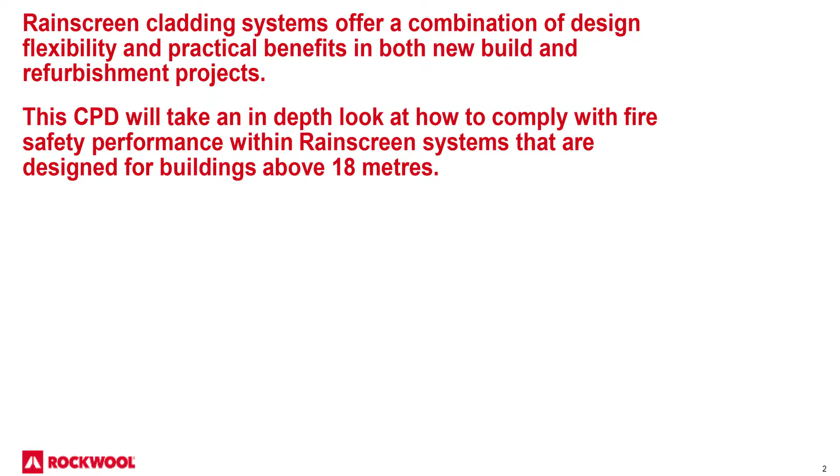This CPD looks at rain screen cladding systems, a combination of the various designs and products out there on the marketplace. We'll also look at how you can not compromise on the design, in particular for buildings above 18 metres. What I'm seeing, certainly since Grenfell, is an interest in using non-combustible insulation for cladding systems below 18 metres as well, a belt and braces approach, but we'll touch on that shortly.

So the contents: we'll have a look at ROCKWOOL. I'm sure a majority have heard of ROCKWOOL before, celebrating 80 years this year. We'll look at the background as well, BR135, which is the driver in respect of external insulants, and also the testing, BS8414, full-scale fire testing, both parts 1 and 2.

Then we'll take a brief look at all the stakeholders - Aviva, Zurich, Allianz - who are getting pretty vocal, as you could probably imagine. They're looking at mitigating a lot of their loss, which currently stands at just over £9 million a day as of 2015. And then compliance without compromise.

We'll look at the insulants that are out there on the market, everything from your foams, glass and stone wool.

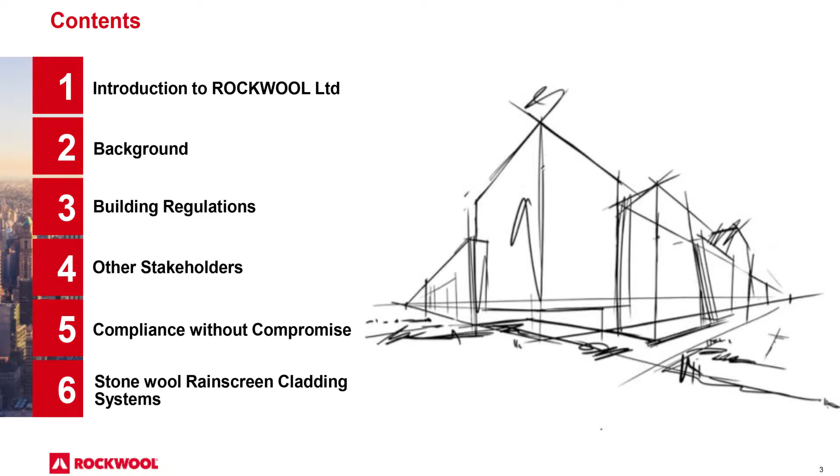So the ROCKWOOL Group, as I said, we're celebrating 80 years, still family owned to this day, owned by the Kähler family. Headquarters is over in Denmark. Operational in 37 countries worldwide, and you can probably see from the chart, majority of it is Western Europe, 49%, and Eastern Europe. We're commissioning another plant over in North America.

We've got sister companies - Rockpanel and Rockfon. Rockfon manufactures ceilings, Rockpanel external cladding. We'll talk about Rockpanel shortly when Jenny takes the stage.

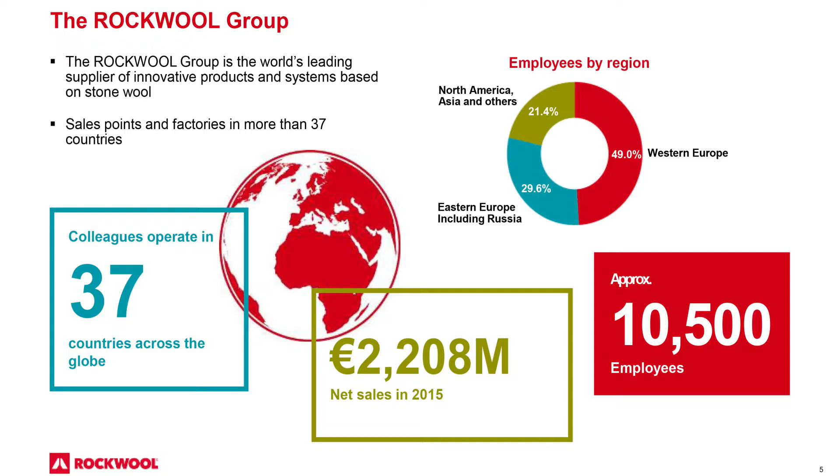Net sales in 2015 were 2.2 billion euros, and we've got approximately 10,500 employees worldwide.

Here in the UK, we produce out of Pencoed in Bridgend, South Wales, and I've got a sample here. It's basaltic rock. We actually bring that in from just outside the Giant's Causeway. You'll be surprised how many specifiers and architects out there still think we're made out of Newcastle Brown Ale bottles. No, that's glass insulation - this is ROCKWOOL.

So we bring it in from just outside the Giant's Causeway, put it on a boat in Belfast, ship it down to Cardiff, then from Cardiff up the M4 to Pencoed in Bridgend. We've been operational there since 1979, with just over 450 employees here in the UK.

We've also got a marketing and sales function operating out of Chiswick in central London, and the plant was expanded in 2009. We've probably got what could be classed as the most up-to-date production line within the ROCKWOOL Group.

We have the patent in respect of dual density technology, and what I mean by that is on the interface of the rain screen duo in particular, which you'll find in external facades, it's less dense than the actual main core body of the insulation. The benefit is it allows accommodation of any undulation, in particular on masonry substrate, so you're reducing that cold bridge effect.

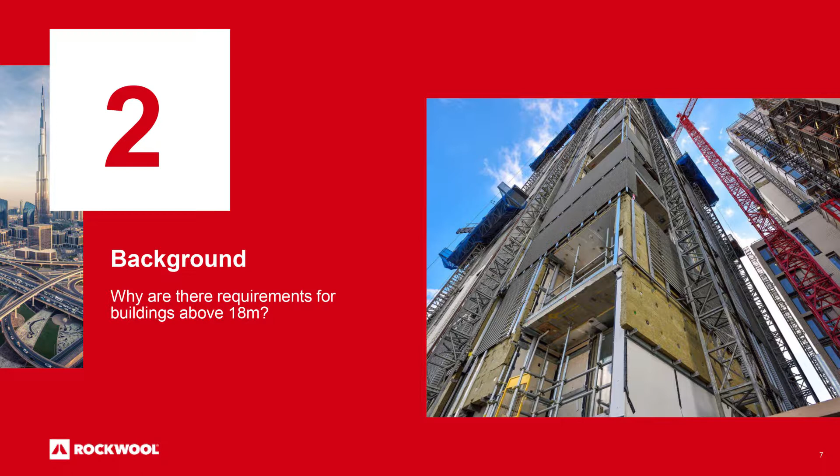So background - anyone like to tell me why 18 metres? Why not 12? Why not 13 metres? Come on, looking for a bit of participation now. Anybody? It's tied up with the old building regs, 50 feet, 60 feet. Yeah, you're right. It's also deemed the safest height to tackle a fire from street level to parapet.

But I'll give you a fact: the first responders to Grenfell on the 14th of June this year, the tallest ladder they had on the appliance, the first appliance to reach the scene, had a reach of 13.6 metres. Yes, 13.6 metres. What they typically tend to do, though, is stack the ladder on top of the appliance. Unfortunately, they couldn't do that at Grenfell.

The reason for that is because all that aluminium, all that insulation, was melting and dropping down. There was no safe way of actually getting under the underside of Grenfell and tackling that fire. Even so, the fire spread was so rapid it would have been fruitless.

So as you can imagine, there's some special requirements in respect to buildings 18 metres or above.

You can see here on this picture, that's the Kingdom Tower, Jeddah, Saudi Arabia. That's going to be coming online in 2019. It's 1,000 metres tall, or 167 stories. Just to put it into context, the tallest building in Manchester is going to be Owen Street, 67 stories tall. It's going to tower, pardon the pun, above Beetham Tower, the Hilton Hotel. So 67 stories will be the tallest tower in Manchester. Renaker Build are the main contractor of that project. But that pales into significance against 167 stories.

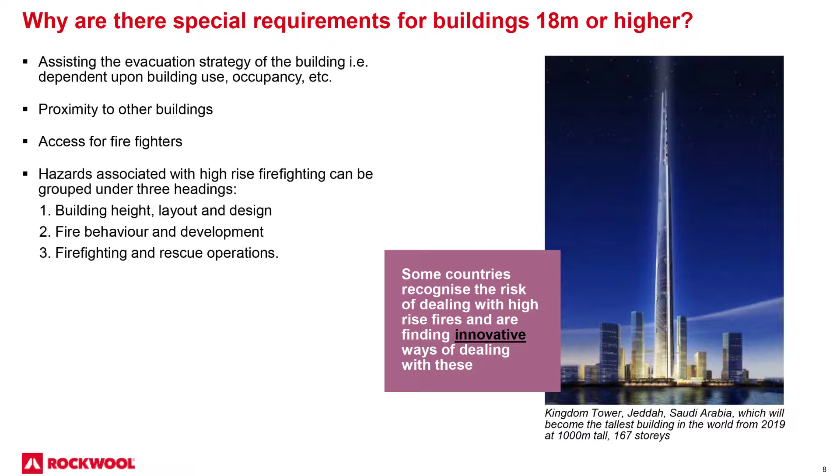Access for firefighters is another issue. Also, one of the other things we find difficult when drawing up engineering judgments is open plan offices. I know there's a couple of people here who've worked on St. Peter's Square, open plan, very difficult. You've got a lot of products in modern day offices which are flammable, combustible, and will contribute to that fire load. So it's very difficult trying to contain a fire when it's open plan in that nature.

I'm going to click on this link, hopefully it'll work. It'll give you an insight into some of the innovative ideas, in particular this one in Dubai.

So you can see from that, they have actually ordered 20 jetpacks for firefighters and first responders. That's not so the firefighter straps himself into this machine and tackles the fire, it's so they can go up with a camera and identify the heat signatures within the building, then direct the first responders on the ground to where those heat signatures are. It has a safe flying height of 3,000 metres, and I kid you not, I had to read it twice, but this thing is actually powered by kerosene, the same fuel that drives your aircraft. So you get close to the fire, and I'm sure you'll get involved with it somehow.

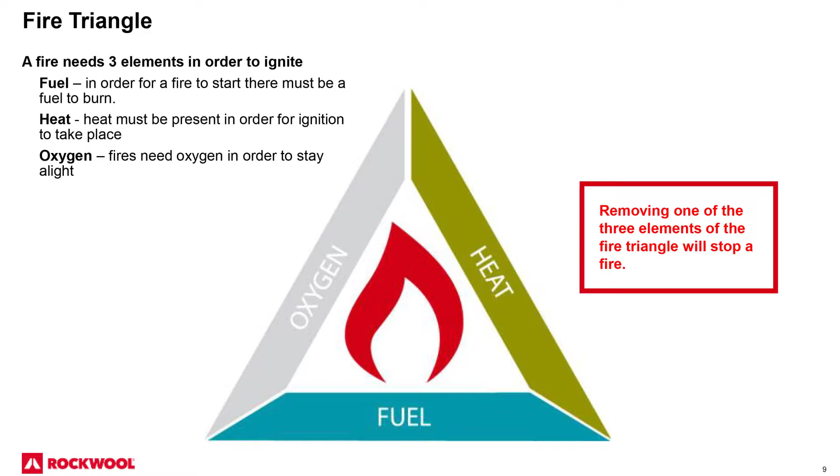I'm going to show you a short video in respect to the candle test, filmed over in Sweden. It gives you a bit of an insight as to how quickly a fire takes hold. You can see from this slide, from ignition point, start of fire and flame spread, it's usually pretty rapid. We then get to the point known as flashover, going from, as you see from the video, 200 Celsius to 800 Celsius. Anything above 600 is classed as flashover, so everything within the room is then literally consumed by the fire. So I'm going to click on this video link and hopefully it will work.

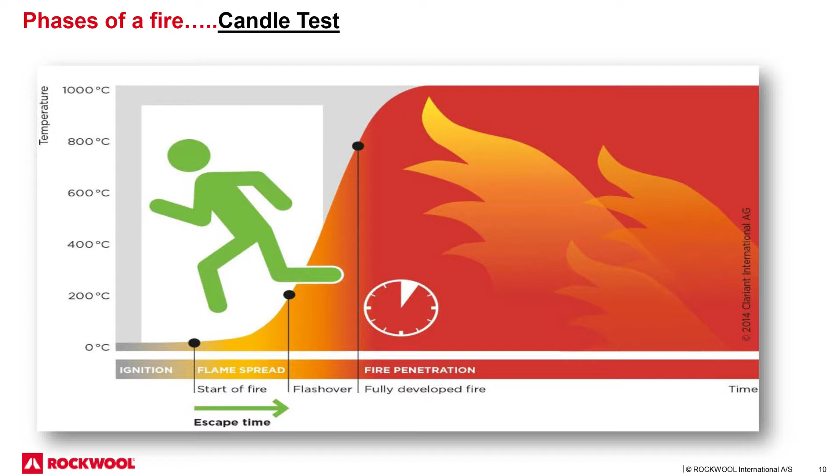So what we're looking at here is the timer and the temperature. As you'd expect, you can see various products in this video which you would find in any modern day office. You can gradually see the temperature rising here, just keep an eye on that.

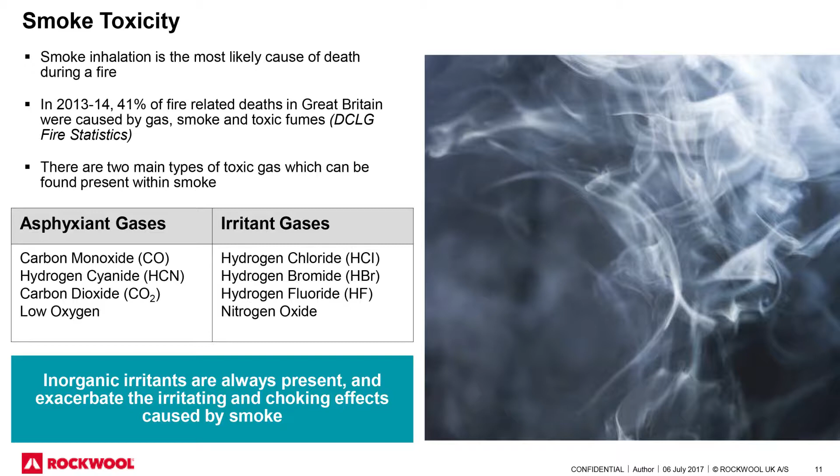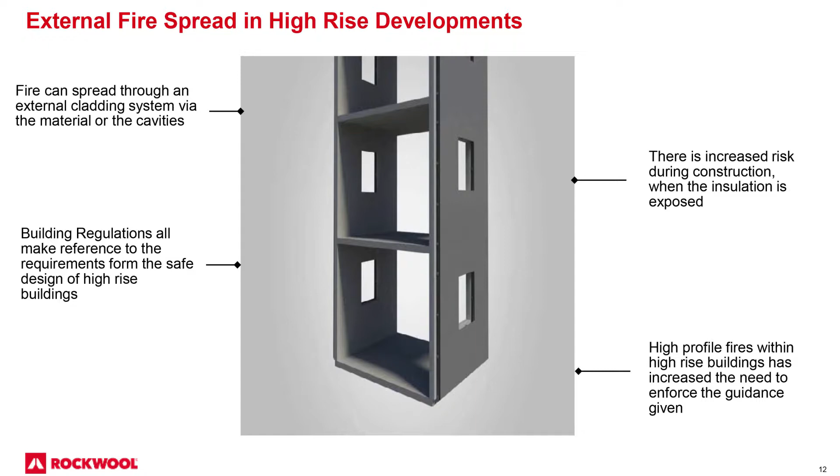So if you have a look at the external fire spread in high-rise developments, there have been a number of tests undertaken, and one of them obviously post-Grenfell. One test in particular has demonstrated that you only need a residual cavity of 25 millimetres to create that chimney effect, that spread of fire within the residual cavity. So as you can imagine, there's an increased risk of fires during the construction period. In particular, timber frame. We've seen a number of high-profile timber frame fires in and around the northwest over the years during the construction phase.

But high-profile fires within high-rise buildings are obviously increasing the need to enforce good workmanship and ensure that guidance is followed. Now, building regulations all make reference to the safe design of high-rise buildings. As you think back onto June the 14th, it was a very warm evening, so the windows are open, curtains are flapping. Obviously they're going to contribute to the spread of fire to the external surface that we saw within Grenfell.

So BR135, first edition came about in 1988. It's actually just 6 months after BS476 Part 7, which is Class O. We call it Class O, it's actually Class 0, but we'll keep referring to it as Class O, as the majority of people know it. So at this time, there was no full-scale fire testing. Basically you turned up to a lab with your sample, tested it, and that was it, off you went. They'll tell you how quick it burnt. They'll give you an idea on some of the droplets coming off. They never measured the amount of smoke, didn't even look at whether the smoke coming off that product was toxic. But nonetheless, that's all we had back then.

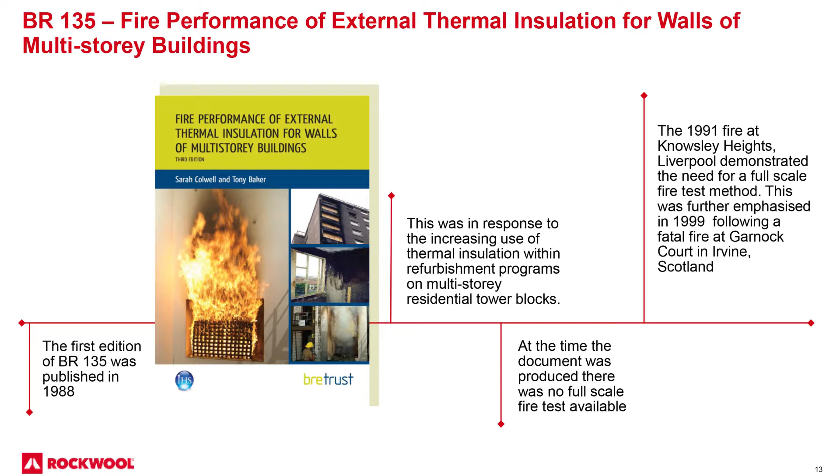But nonetheless, full-scale fire testing was to come along, and that was really in response to some of the high-rise fires that we saw. One in 1991, Knowsley Heights in Liverpool. Then the other one, which was fatal, Garnock Court, Irvine in Scotland in 1999. So in 2003, we saw the second edition of BR 135, and this was accompanied by full-scale fire testing, BS 8414 Part 1. Now, Part 1 relates to masonry substrate. Part 2 is SFS, steel frame.

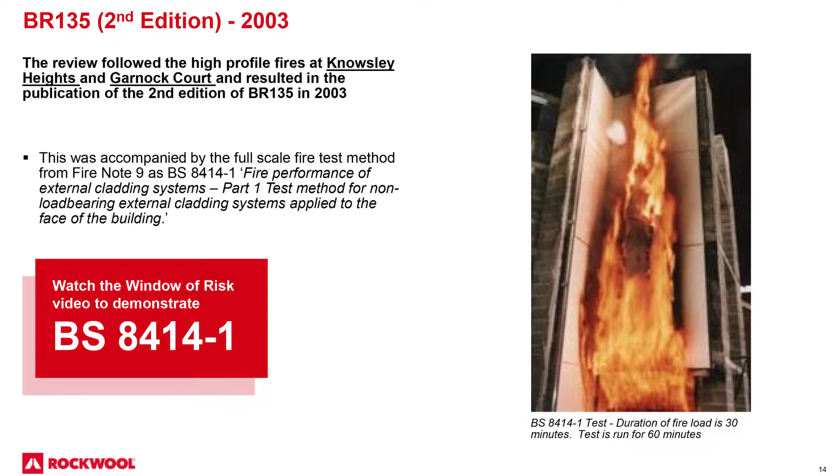I'm going to show you a short video in the next slide, and it just demonstrates the BS 8414 test. Basically, it's a 30-minute fire load. You've got the timber crib, which is ignited. That's left to burn. So what we're trying to do is emulate a real-life situation where the timber crib is ignited and left to burn for an extra 30 minutes. What we're looking at is how quick the fire spreads up the surface of that insulant, the amount of smoke given off, the amount of droplets given off, and of course the amount of heat that's going to be generated from this full-scale fire test.

I'll just click on a couple of these links. Knowsley Heights.

So Knowsley Heights was a deliberate fire over in Liverpool. That was in 1991. You had a waste bin pushed on the underside of the building, and you can see the outcome there. Now, just to think back then, we actually used to clad a lot of buildings in extruded polystyrene. Don't think there's anyone sat in this room who would ever consider that today, but nonetheless, that's the insulant that was used in many respects.

And it was this insulant that was the main cause of the fire spread and the damage you see. As I said, nobody lost a life in that particular fire, but the rapid fire spread was enormous. And as I said, it was really down to the lack of fire barriers back then, as you can imagine, in 1991, and also the combustible gases given off within the facade from the insulant.

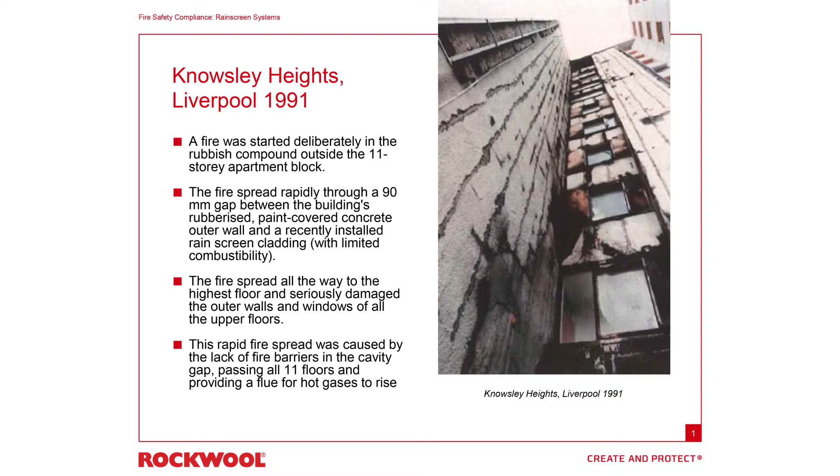We then had Garnock Court. Now, Garnock Court, sadly, there was a fatality. An old age pensioner lost their life. That happened just after midday on the 11th of June 1999. And again, the contributing factor to the severity of the fire spread was down to the recent refurbishment of this block. This was an accident. This wasn't an act of arson. But nonetheless, it was a driver in respect of moving forward to full-scale fire testing.

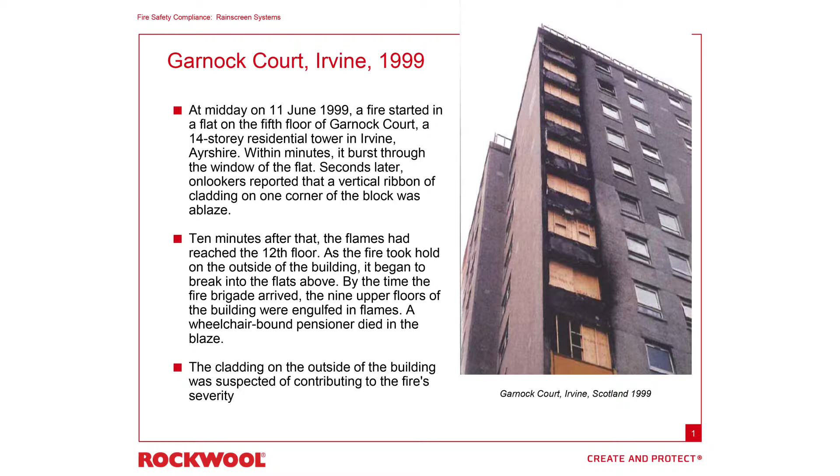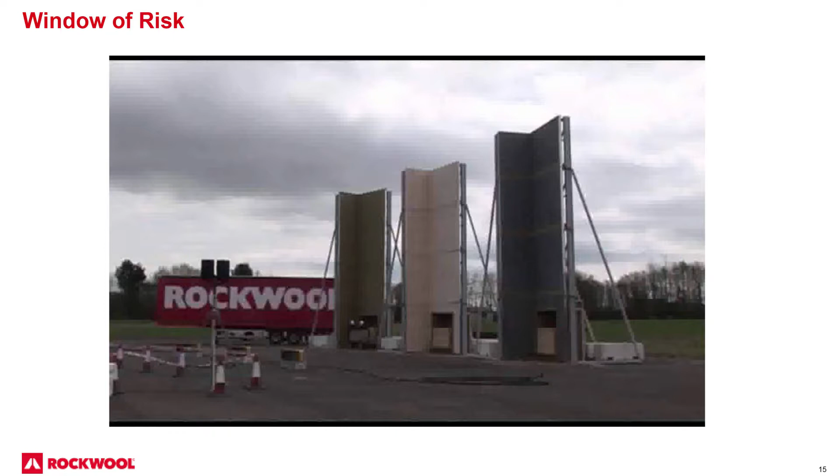So I'm going to show you this window of risk. Many of you will probably have seen after Grenfell, the BBC managed to get their hands on this video, just to demonstrate what an 8414 test is all about. What you see there to the far left, that's stone wool. We've then got foam, and we've then got polystyrene, including fire breaks. There's no clock on here. I'd be interested to see how quick you think it takes to reach the end result. So I'll just click on this. Just have a look at this.

So as I said, the polystyrene there does include fire breaks in this BS 8414 test. So what you can just see here is the thermocouples measuring the heat given off from these 10-metre rigs. Also note the smoke as well coming off the polystyrene in particular.

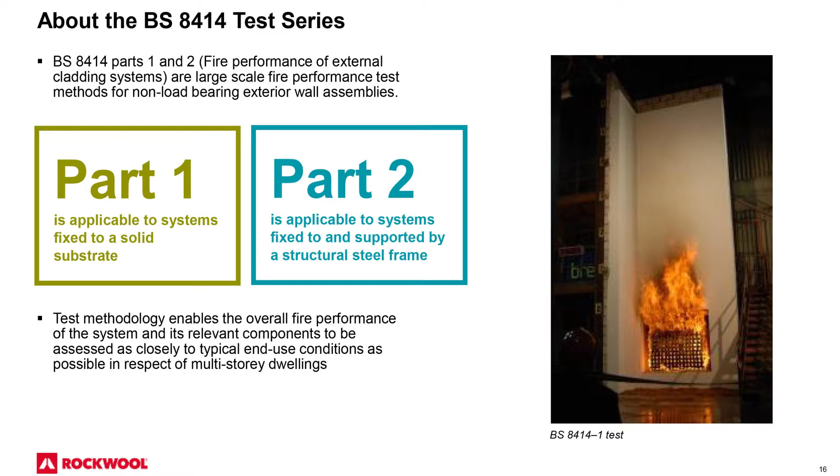So in 2013, we had the 3rd edition of BR135, and what they tried to do is consolidate some of the information that was being put out there, because you had NHBC muscling in on the act. BCA, Building Control Alliance, was also coming along with a number of options in respect of testing, and this document was trying to incorporate the BS 8414 Part 2 test, and do away with some of the misconceptions and guidance that were starting to appear in the marketplace.

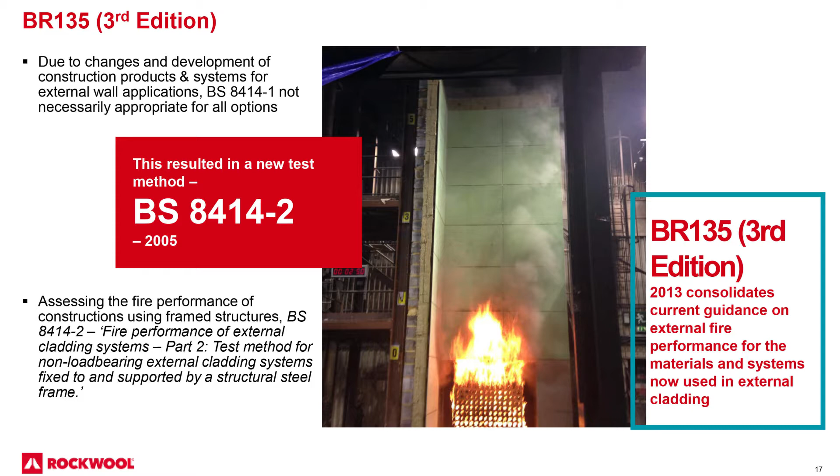So we'll have a look at fire safety compliance. Regulatory guidance documents: Approved Document B for England, Approved Document B for Wales, Section 2 of the Technical Handbook for Scotland, and also Technical Booklet E for Northern Ireland. They all make reference to the safe design of tall buildings, and it's really on the back of the number of high-profile fires that we've introduced large-scale fire testing.

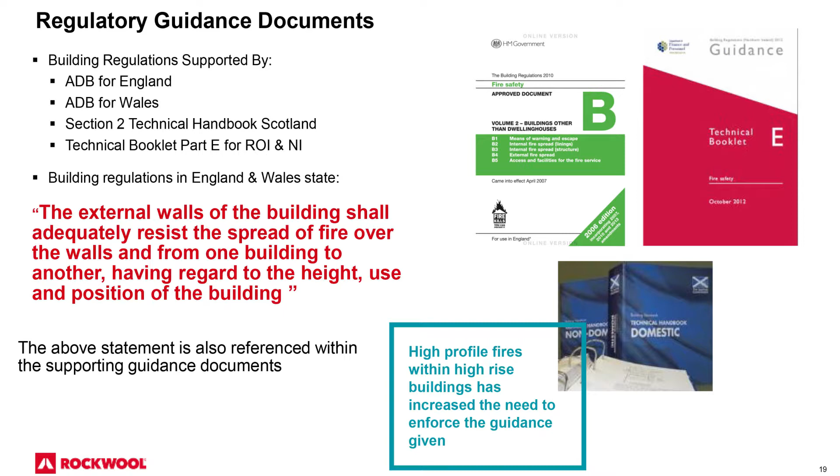It's probably fair to say, given what happened in June of this year, we will no doubt see a big overhaul, in particular of Part B. And after all, it's been demonstrated that fires will progress 4 to 8 times faster today than they did back in the 70s, back in the days of the Woolworths fire. So I'm sure things certainly need to be looked at in the not too distant future.

This is where you see a lot of ambiguity, because what we've seen over the years, obviously we've got Part B as a statutory instrument, Building Regulations 2010. Below that sits approved documents, and then what we're seeing, of course, is guidance upon guidance upon guidance. No surprise there then that a lot of architects, a lot of specifiers are sat there scratching their head,

wondering which way to turn. BR135, 8414 test, you've then got interpretive guidance on top of that, coming from Building Control Alliance Guidance Note 18 and also NHBC. We've then got, on top of that, a bit more guidance from the manufacturer's tested data guidance and also desktop studies and fire engineering reports as well.

ROCKWOOL's approach is pretty simple. It's a linear approach. It's either combustible or it's non-combustible. It's pretty simple, really, isn't it? Either burns or it doesn't.

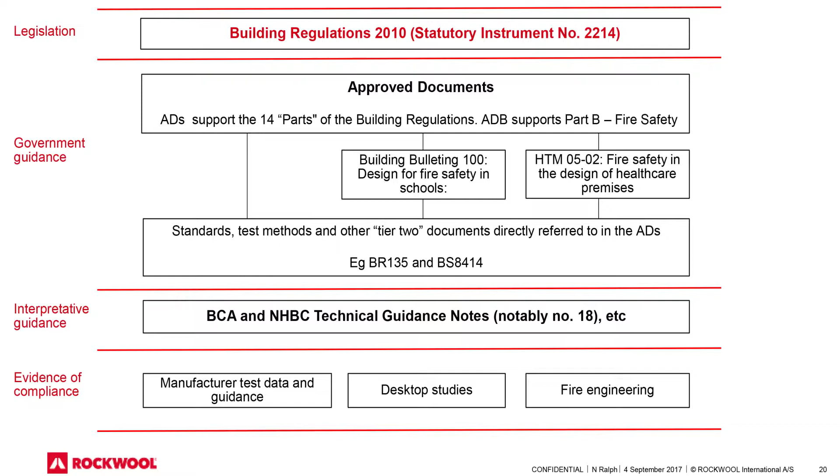So B4, approved document B4, section 12, and this is really referencing what Chris talked about there, about the external envelope of the building. It should not provide a medium for fire spread. But obviously what we're seeing today is the use of a lot of combustible materials out there in the marketplace, not just the facade, but in various different elements of the building.

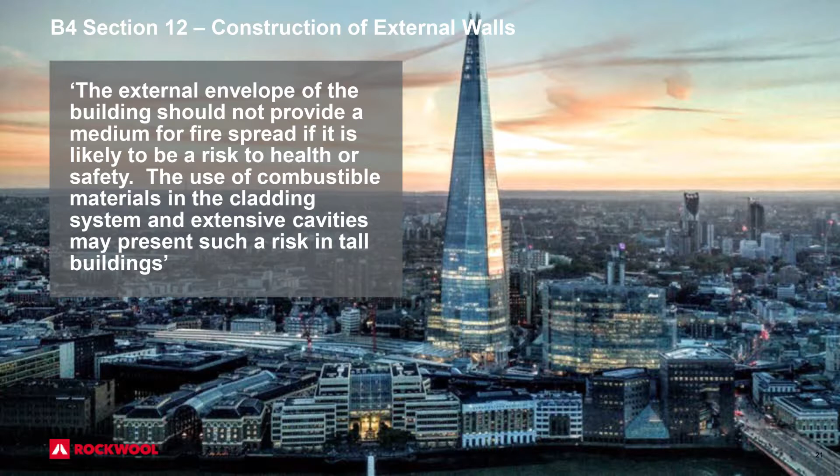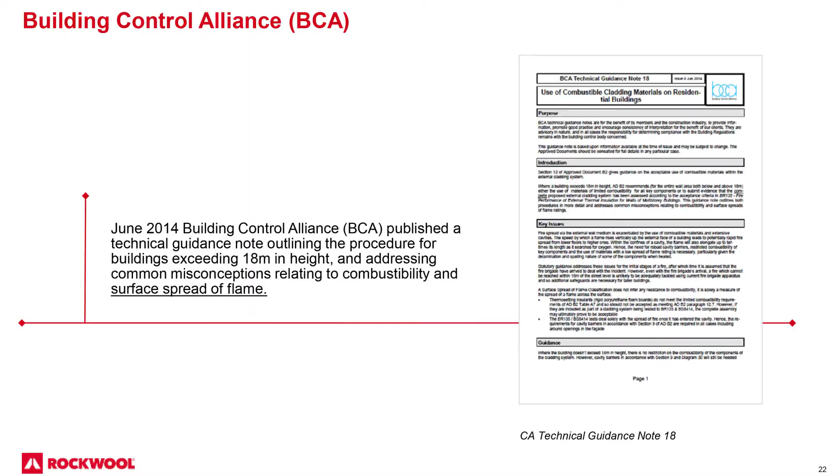So if we have a look, fast forward, June 2014, Building Control Alliance came along with this document, Building Control Alliance Guidance Note 18. What initially they wanted to do away with was some misconceptions surrounding BS 476, which is Class O, surface spread of flame. So Class O classification.

If any of you know how Class O testing works, you've basically got a pilot light, the sample, Part 7, BS 476, the sample is then introduced to the pilot light. What we're looking at is a spread of flame from the point of the pilot light, which is then extinguished, all the way across the actual product being tested.

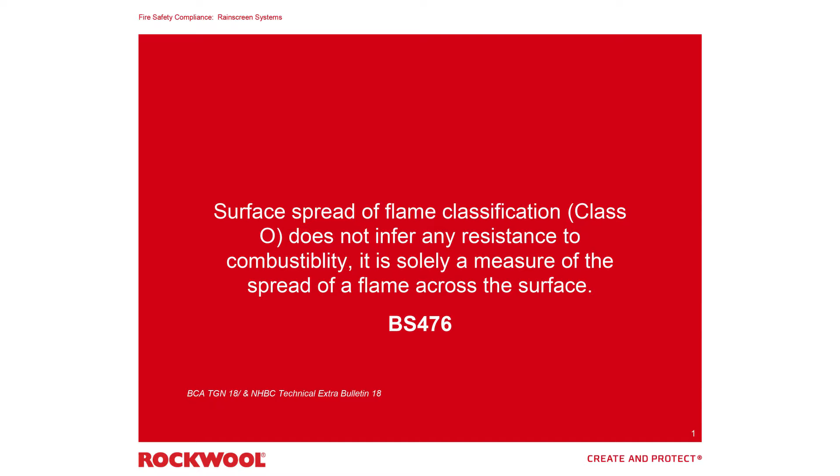So you could, in effect, take a stick of trinitrate and wrap it in a Class O foil. You've then got yourself a Class O product. Once you burn through that Class O foil, you're then down to the core, and usually, depending on what the product is, it is combustible.

We've then got option 1, so the use of limited combustibility products, or material of limited combustibility. The next slide I'm going to show you references EN 13501, which is a European fire classification. So as you see there, A1, best performing, non-combustible, stone wool, glass wool, foam glass. Tend not to use foam glass in this country, mainly found in Benelux regions. It's pretty expensive. Nonetheless, it behaves very well in fire.

So as explained by Chris earlier, S denotes smoke, D denotes droplets. So S3, worst performing, D2, unlimited droplets. If you look at some of these ACM panels that are out there on the marketplace, the one in particular on the downtown in Dubai, that went up August of this year. Initially, it ignited in December 2015, Christmas time, 2 years ago.

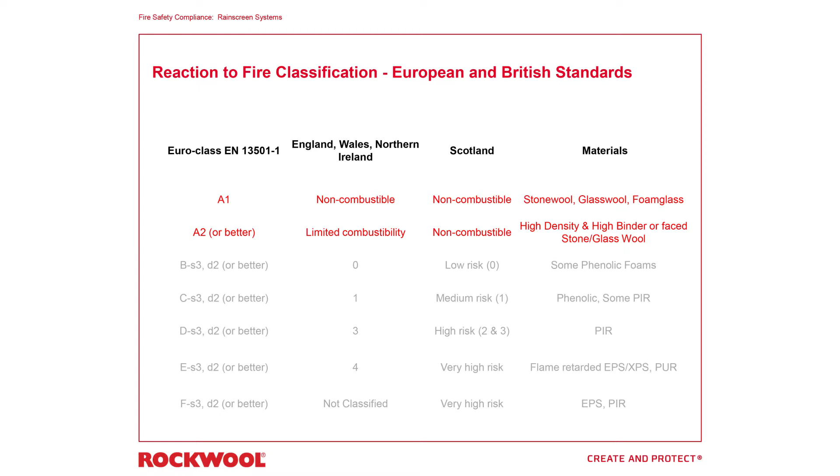So the other option, option 2, that's the proposed test or field of application test. What that is, basically, you have to do a full-scale fire test, a BS8414 test. The issue you have is if you deviate from that test slightly, and when I talk about deviation, I'm talking about even something as pedantic as the helping hand bracket. So if you're testing using an envelope bracket, but then on site you're going to use a plaster strip bracket, then that test becomes void.

Unfortunately, there was a subcontractor who fell foul of this procedure back in 2014 on a project down the road from here, namely First Street. They tested using a different manufacturer than what was used during the construction period. Building control came along and failed it.

We've now got option 3. Option 3, if any of you were watching Sky News a couple of weeks ago, 8 o'clock, talking about Grenfell: desktop studies. We're actually the only country in Europe who offers desktop studies. You're not obliged to publish the results either. So you could commission a desktop study, and whether or not you'd get to see the results, you'd get to know whether or not it passed or failed.

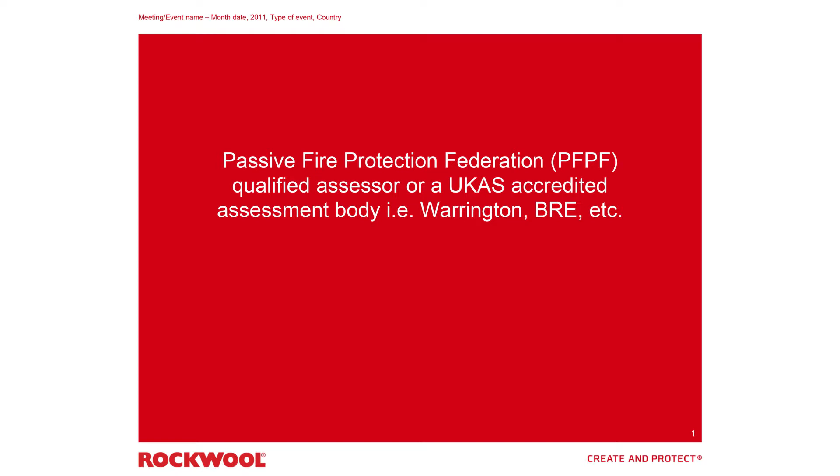But nonetheless, a desktop study, as the name suggests, you sit there behind the desktop, you're collating all of the different test data undertaken, and then you're going to predict whether or not that would be suitable, whether or not the behaviour in fire would be acceptable. Needless to say, I think post-Grenfell we're going to see desktop studies get kicked into the long grass and they will certainly disappear.

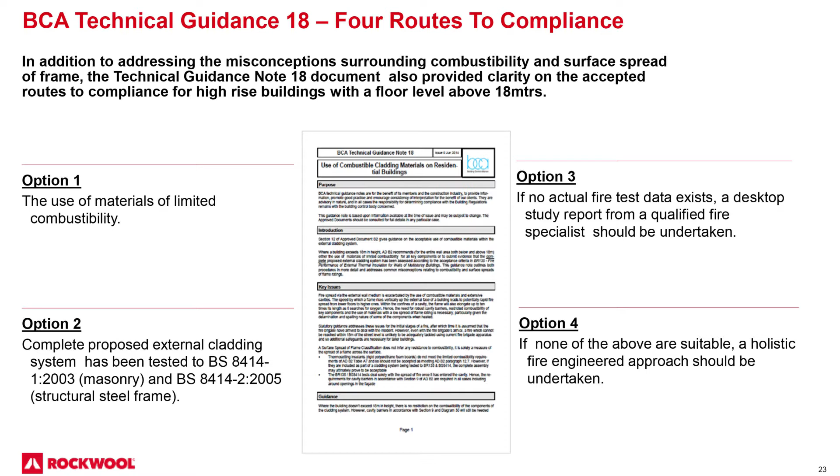We've then got option 4. So option 4 is the holistic fire engineered approach, very expensive. If you're getting much change from £75,000, you're doing very well. You're probably looking at around 15 weeks to get a return on this, and at least 3 or 4 reams of paper landing on your desk. And you can see there the type of individuals who have to undertake these holistic approaches. Not to say it's not been looked at, but I have yet to see a project which has gone down that route where a holistic fire engineered approach has been adopted.

Building Control Alliance still have the 4 options. Probably fair to say it's being looked at. In fact, I know it's being looked at. Whether or not they'll go down this route, we're yet to see. But nonetheless, the 2 options are available currently as we stand via NHBC.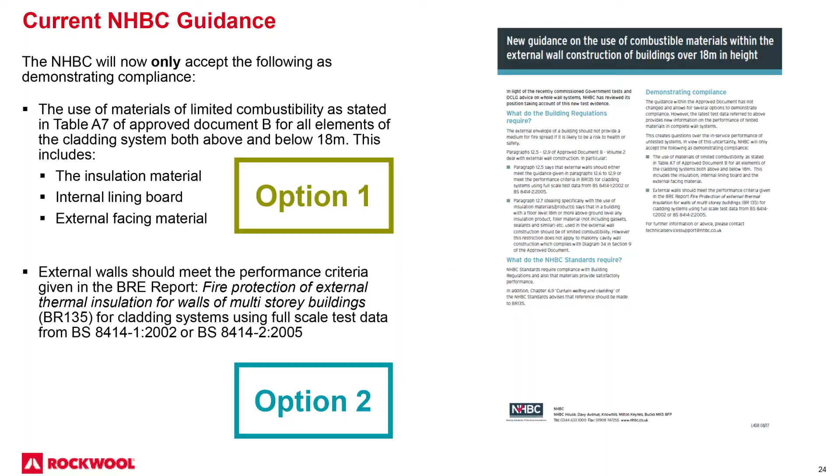And obviously what we've got to look at is the smoke given off as well with these combustible products, because that is a real killer. 60 to 66% of people, as I say, will die in a fire through toxic smoke inhalation.

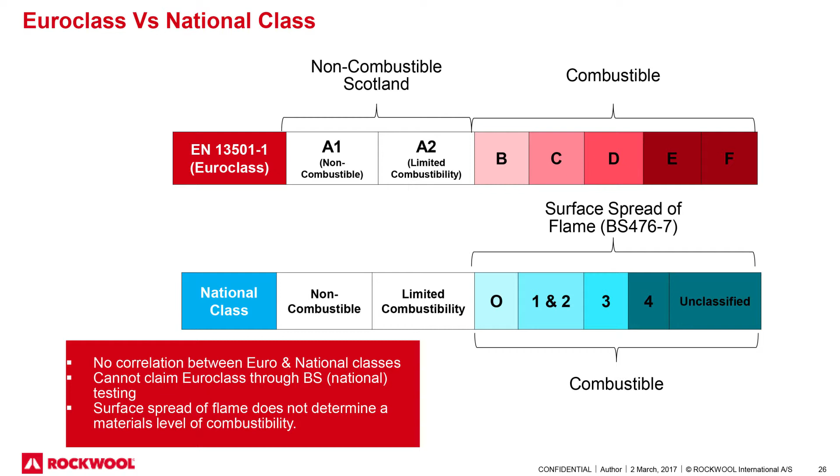You've also got to look at the changing character of the actual building products, the melting, the dripping, because that's obviously going to propagate fires. That's going to assist in fire spread. And you can see from the chart there, as I said, non-combustible, limited combustibility. So, as said before, our approach is pretty simple. It either burns or it doesn't.

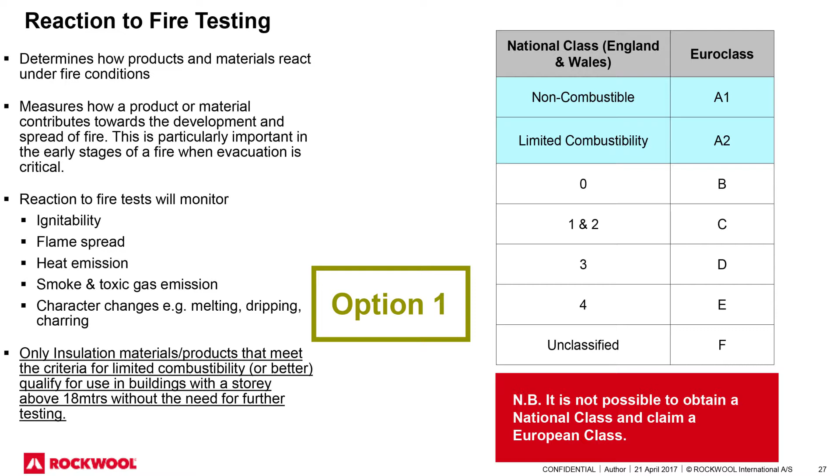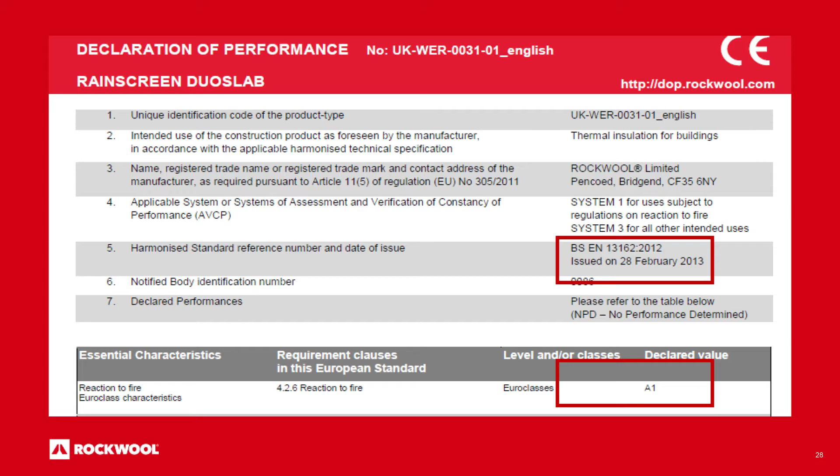So determining the fire classifications, that's the declaration of performance. What we always say to architects, specifiers: ask for the product's declaration of performance. You're looking for the harmonised standard reference. More importantly, you're looking for the declared value in respect to 13501. Always ask for that declaration of performance. They should be forthcoming and furnish you with that information. Any building products manufacturer should be forthcoming offering up that information.

Ours is readily available, as you can see there. Download it in a PDF format. So we have nothing to hide, of course. It's all there for everyone to see.

So defining combustibility. Non-combustible, pretty simple really, is non-combustible. You've probably heard those terms before: fire safe. That does not define the reaction to fire. Fireproof, fire retardant. Oh, my product is flame proof. That does not define reaction to fire. Non-combustible is a legally defined term within building regulations, and only materials achieving the highest standard of reaction to fire can actually be classed as non-combustible.

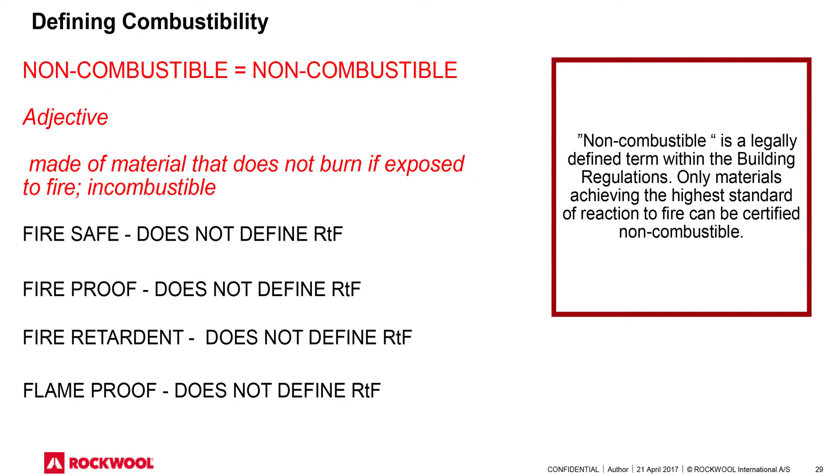As I mentioned before, external fire spread, internal fire spread, and some of the recent testing. A residual cavity of 25 mm to create that chimney effect is all that's required. So you're going to get those gases given off by the aluminium, by various combustible materials burning away, which are going to create those gases within that void, which are then going to ignite and spread the fire.

Mechanical performance as well. Some of the things being looked at by BRE: helping hand brackets. Aluminium will obviously melt at around 650, 680. So there's various different elements within an external facade being looked at. Not just helping hand brackets, you've also got to look at fixing head screws which are retaining the insulation back to the wall. Some of them out there in the marketplace are plastic; it's going to burn away.

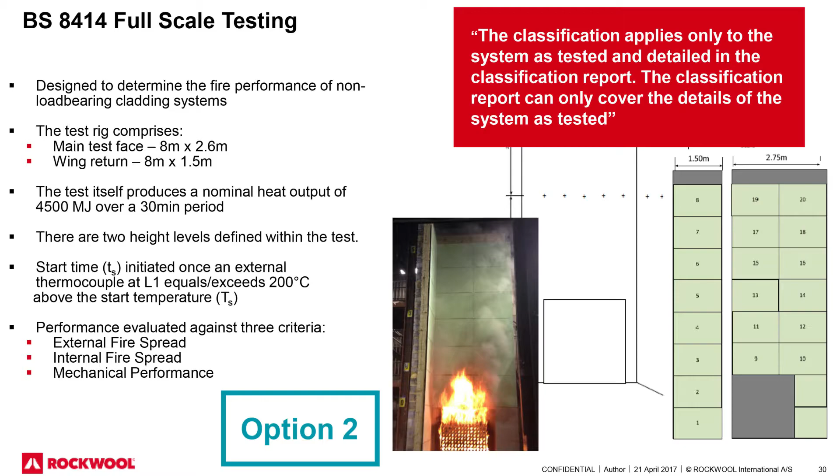So fire safety compliance. I spoke before about some of the insurers and the risk management companies out there. There's a couple of jobs in Manchester, one of them where the insurer, Zurich, turned around and said, this was post-Grenfell, you need to take that material off the wall. We will not insure the building unless non-combustible material is used, and also paneling as well. And if you can't get insurance on the building, you ain't going to get a mortgage. So they're starting to get a lot more vociferous.

You can see there the first half of 2015, £9.2 million. So you can quite clearly understand their position, how they're wanting to mitigate a lot of that loss. Failure to disclose accurate information, very much like insuring your car. If you fail to disclose accurate information in respect to building products used during that project build, then it null and voids your insurance. The use of modern combustible materials is going to add fire load, and that's where they're looking to turn to not just manufacturers, but also people like LPCB, the Loss Prevention Certification Board.

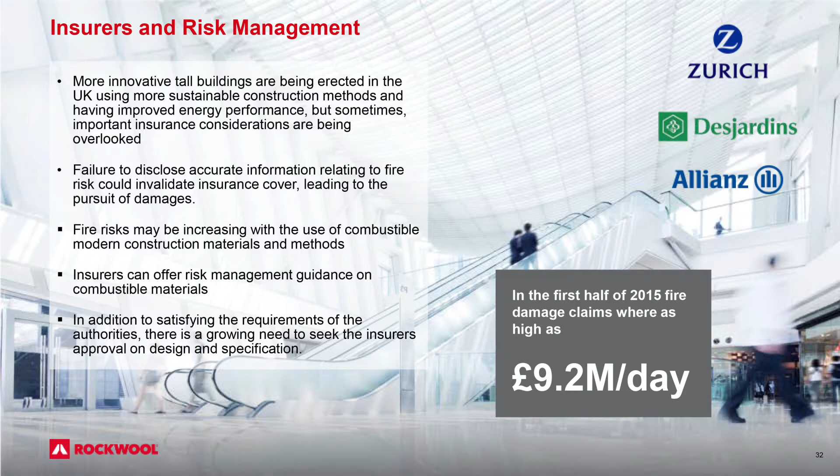And what I would say to you, go on the LPCB website, have a look at their guidance. They've undertaken a huge amount of testing. Worthwhile downloading the file. It's a huge file, about 800 megabytes. So it's definitely worth downloading and having a look.

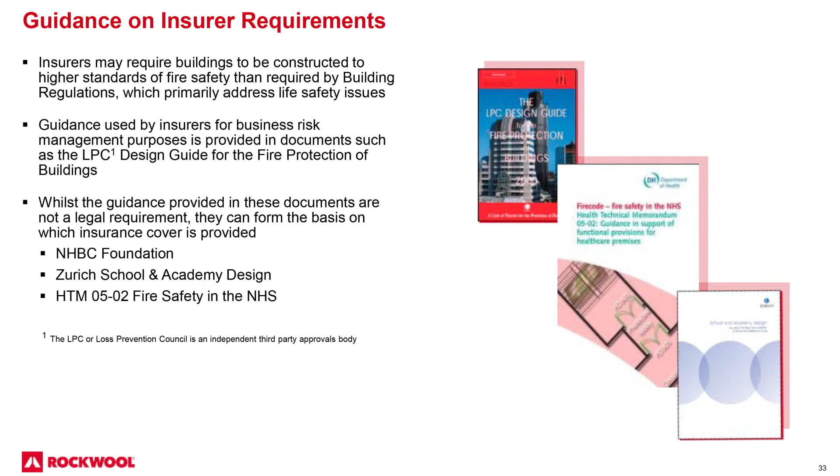That's a statement that was issued by Zurich - that was pre-Grenfell. So as a guide, non-combustible insulation should be used: rock mineral fibre type, stone wool, or man-made vitreous fibre, glass wool in layman's terms. This just shows you how more vocal and pressing they're becoming in respect of the insulation products actually used out in the marketplace.

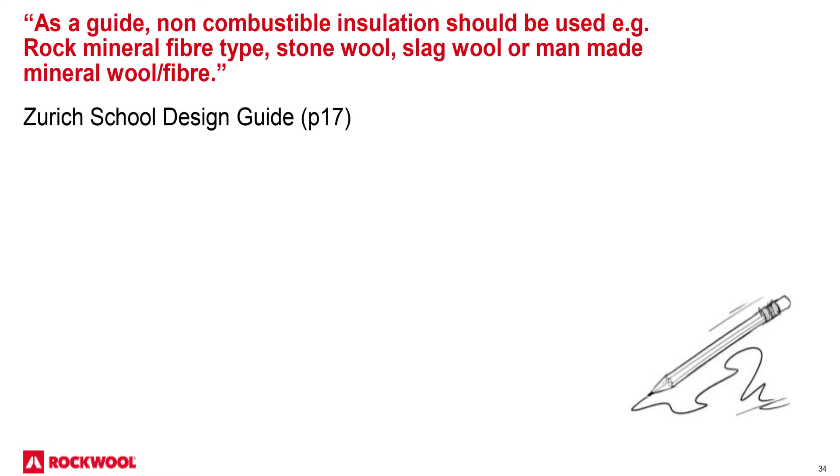I'm just going to briefly talk about the RRFSO, the Regulatory Reform Fire Safety Order. It came about in October 2005, passed, made legal in 2006, October of that year.

What that basically means is you, as a fire officer, no longer need to visit a site, visit a building and issue a fire certificate. So the building owner will appoint a competent person. That competent person isn't going to be thinking like a fire officer. A fire officer entering that building is going to think: can my fire officers tackle a fire on these premises if one was to ever break out?

It's fair to say building owners putting forward competent people legally have to get it right, otherwise they'll be serving time at Her Majesty's pleasure if it's found to be wrong. But nonetheless, it's diluted what many fire officers would see as a very important certificate.

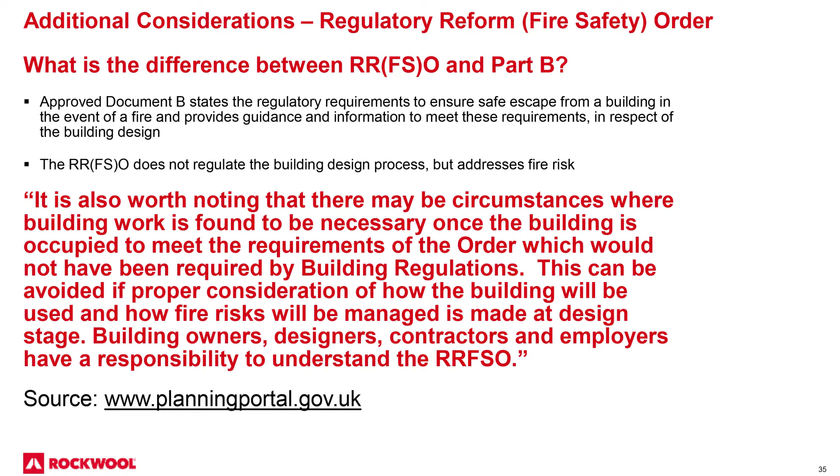It's also worth noting that once the building has been erected, put into place and is habitable, a fire officer can attend - very much like Ofsted - can pitch up, no invite needed, can turn up to the building premises, inspect that building, have a look at the passive fire protection, and if it's deemed unacceptable, he can then issue a certificate or a warning whereby the contractor or subcontractor, if they're still about, has to come back and undertake remedial action.

So compliance without compromise. Stone wool can actually withstand temperatures exceeding 1,000 degrees Celsius. You're not going to get any of these toxic hydrogen cyanide fumes given off from stone wool. It's going to reduce the effects of smoke damage, and also reduce the risk to property and asset damage.

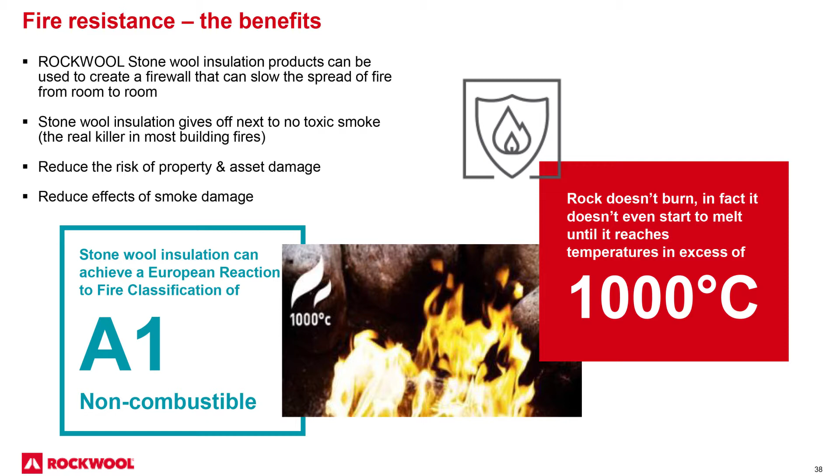This gives you an idea in respect of the temperatures. Polyurethane and polystyrene, around about 200 degrees Celsius, you're going to start to see burning or melting in respect to those products. Fiberglass, 600 degrees Celsius. And as I mentioned, stone wool will take temperatures exceeding 1,000 degrees Celsius. You can see along the bottom there the time in respect of hours and exposure to fires.

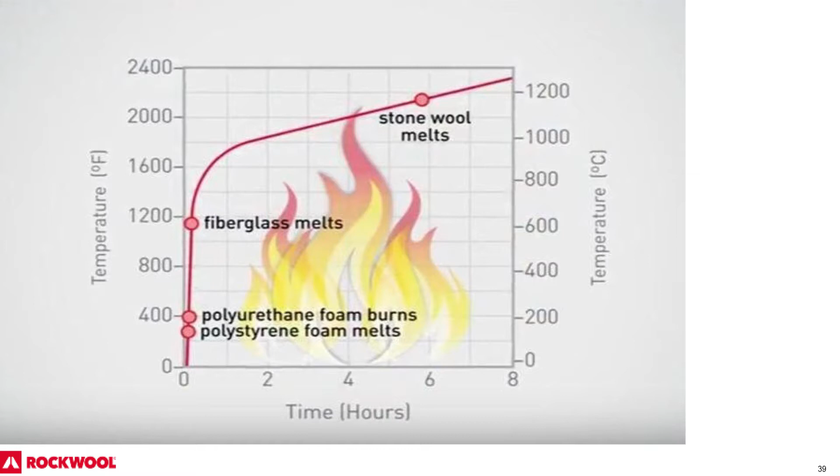Acoustic benefits - I'm going to hopefully try and wake you all up now and just demonstrate how ROCKWOOL works in respect of its acoustic properties. Not really looked at when it comes to external facades. On saying that though, we've got one project here in Manchester, Circle Square, which was where the old BBC studios were sited, down the road from here. Very expensive student accommodation - there is an acoustic requirement, and that's why they specified ROCKWOOL within the facade.

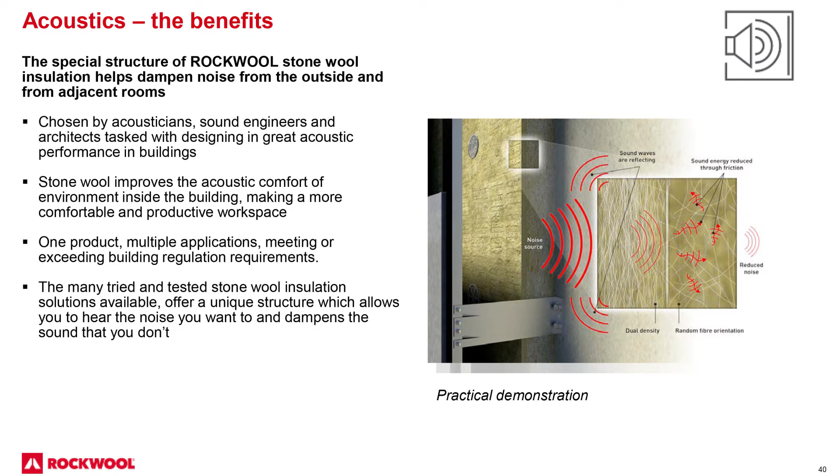We're using density in respect of killing or reducing the noise effect. As you can imagine, there's products out there in the marketplace which do nothing apart from act as a flanking agent or reverberation agent when you place them within the facade. But I'll quickly demonstrate, give you an idea as to the benefits of ROCKWOOL and the acoustic benefits.

So this is going to bang out probably around 120 dB, just to give you a bit of a crude idea of how it works.

As you can see, it's working pretty well there from that crude sample. But if you ever get a chance to visit Bridgend, we've got a demonstration lab where we fire a starting pistol into a tube of ROCKWOOL, which demonstrates it very well.

The thing with ROCKWOOL is it works very well in respect of all frequencies, low and high. What you find with glass fibre in particular is it works very well at high frequencies, not so good with low frequencies. So when we're looking at jobs that have specified ROCKWOOL, Cineworld for one specified ROCKWOOL, mainly for acoustic benefits.

More importantly though, it's the behaviour within fire. Obviously you want to buy time to get visitors out safely.

Dimensional and thermal stability - some accelerated testing has been undertaken. The way we stop conduction, convection, or warm air migrating from the warm side through to the cold side is basically trapped air. That's how we slow down the conduction and convection process.

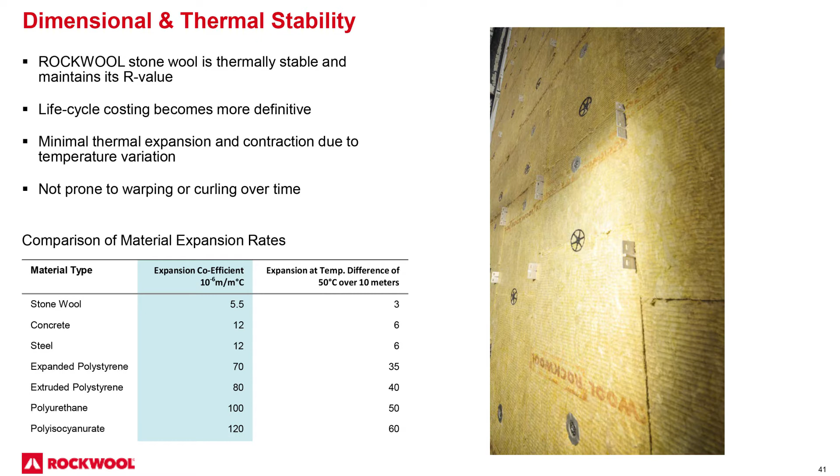A building is supposed to last 75 to 80 years, and it's fair to say ROCKWOOL insulation, which has stood in buildings for many, many years, is as good now as the day it was first placed into the cavity. It's also not prone to warping or curling over time. You'll see some materials exposed out there to the elements which have not behaved very well when it comes to resisting that warping and curling.

I spoke before about the dual density technology. As I said, the interface of the ROCKWOOL rain screen duo is less dense than the core body of the actual slab. The benefit is it's going to accommodate any undulation, particularly on concrete substrates, so you're not going to get that standoff which you would probably get with a solid board.

Thus it's going to eliminate or certainly reduce the cold bridging effect. It's also quite pliable, and you can see here on the helping hand brackets sticking out, you've not got that dog leg effect - so again you're reducing that cold bridging effect.

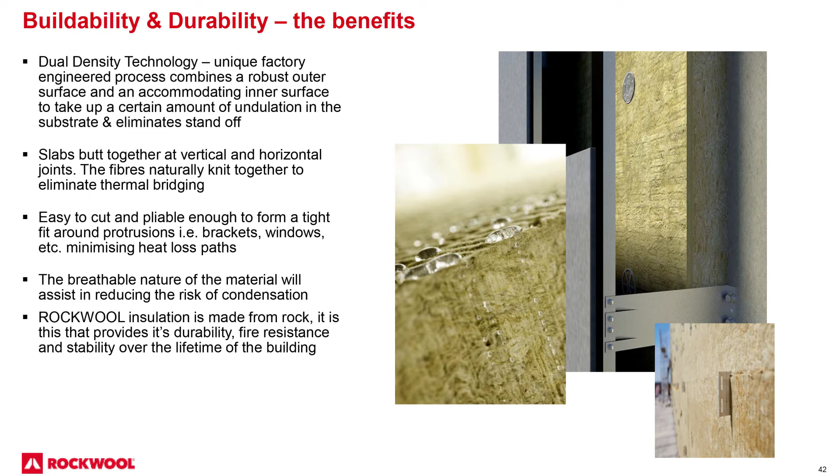We're the only manufacturer of stone wool rain screen cladding which has a BBA certificate as well, so that's worth having a look at. That's available to download on our website.

This is something, as I said before, part of our corporate social responsibility, and we have actually secured many a job on the very fact that we can take back stone wool, rock wool, to the factory in Pencoed and recycle it.

Where we have a few issues, it's fair to say, is the fire barrier, which is encased in chicken wire. The reason for that is because it's coming out of the cupola furnace very much like candy floss in the manufacturing process - spinning discs with thousands and thousands of holes. The problem with that chicken wire which encases the fire barrier is once it's secured, the curing oven then solidifies it, and it's going to start blocking up these holes, which can cause issues with density and micron diameter.

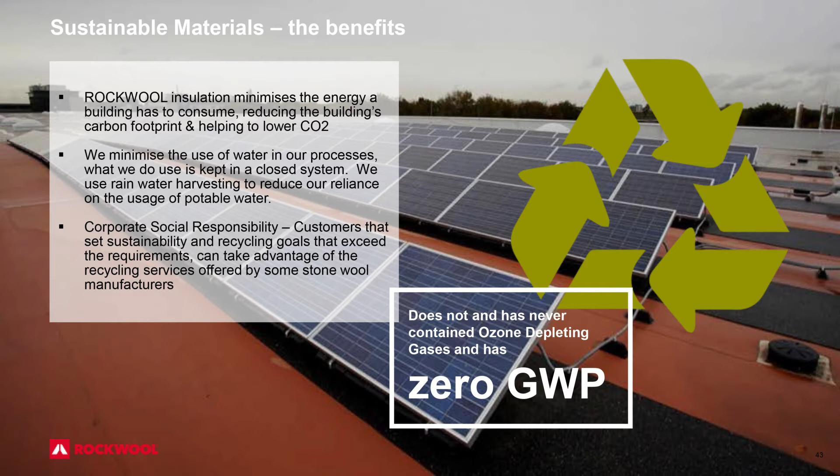No global warming potential, and no ODP gases neither.

As I mentioned before, BBA certification is all important. When you're looking at third-party approvals - LPCB, Loss Prevention Certification Board, BBA certification - and as I keep reiterating, ask for that declaration of performance in respect of the building product, looking for the declared value in respect of EN 13501.

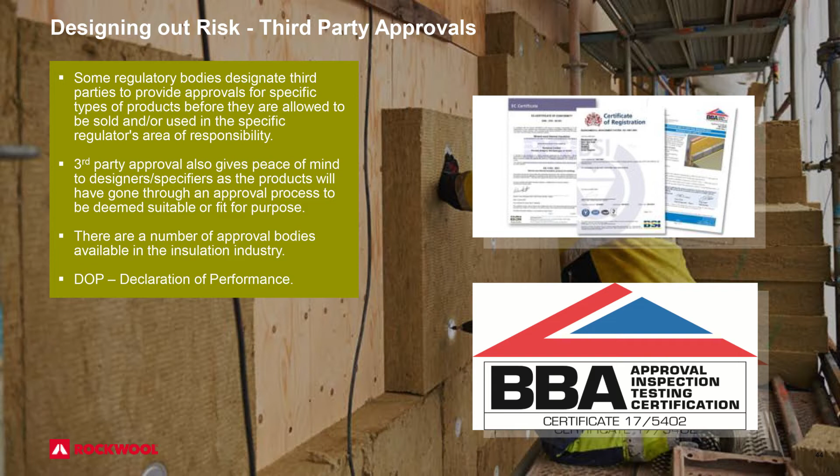One of the things ROCKWOOL is pretty proud of is London Underground. You can imagine London Underground doesn't hand out certificates for insulation to be used down there in the subway for obvious reasons. We have LUL approval for London Underground Network and stations, and CE certification, which became mandatory in Europe in 2013. And as I mentioned, LPCB ensures product conformity, and it does as it states on the tin.

The other thing to look at is BRE wind test data, again readily available from our technical department. With ROCKWOOL being of a higher density than foam products, when it's fixed in situ, it tends to stay there. So you're not going to fix it Friday afternoon and come Monday find it in the pub car park next door, which you've seen on many occasions, surprisingly, with a number of other products in the marketplace that typically get ripped off the wall when the wind picks up.

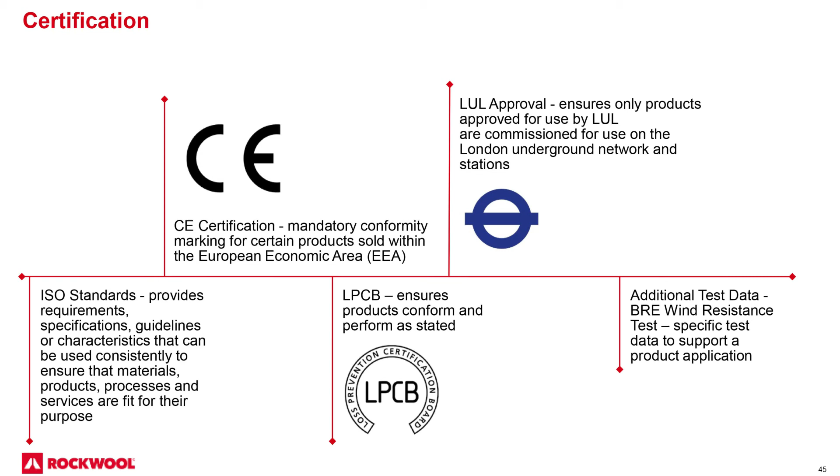One thing to note - if anyone was watching Sky News a couple of weeks back, it mentioned the calorific value of the insulation wrapped around Grenfell. It was equivalent to 30,000 litres of petrol. That was the calorific value of the insulation and panelling wrapped around Grenfell. And how do we work out calorific value? Well, we basically take a product, we burn it, and we look at how much heat is given off. In a nutshell, that's how we work out calorific value.

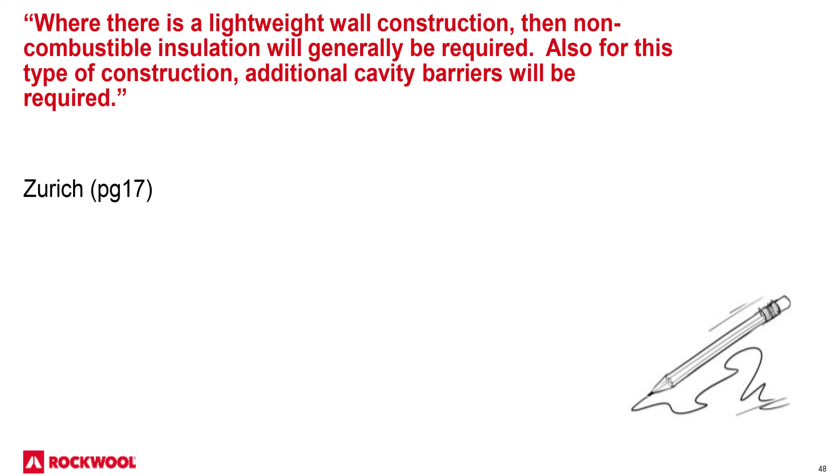There's a statement from Zurich. As I said, they're getting quite vocal, and I'm sure we'll see more and more statements coming from Zurich and the like in the not too distant future. They want to mitigate their loss, they want to ensure buildings are fire safe. Sadly, in this country it's been a race to the bottom in respect of U values. It's always thermal first - we've often been tempted, or in some instances demanded by clients, to get 0.11 of a U value. Even 0.10 now, 0.15 I think on Middlewood Locks.

So yeah, it's always thermal first, sadly. You look at other countries like Germany - whenever an architect or specifier sits down, it's fire first. That is what's at the forefront of their mind: how do I prevent this building from igniting? Pretty simple - you use non-combustible insulant.

So, checklist to compliance. Option 1, least path of resistance: A1 non-combustible or A2 limited combustibility, as per the EN 13501 table. Option 2, the proposed route: a field of application test, a full large-scale fire test - BS 8414 Part 1, which is concrete substrate, or BS 8414 Part 2, which is steel frame substrate. You can also look at a desktop study. As I said, unfortunately we're the only country in Europe that does desktop studies. Whether or not you get the results is a matter of choice. Hopefully desktop studies will become a thing of the past going forward.

Option 4, yeah, we'll move on. Additional credentials: third-party approval - look for the third-party approval, look for that declaration of performance, all important, that declaration of performance. And also warranty - is the product warranted? Can you leave it exposed on site 4 weeks, 8 weeks?

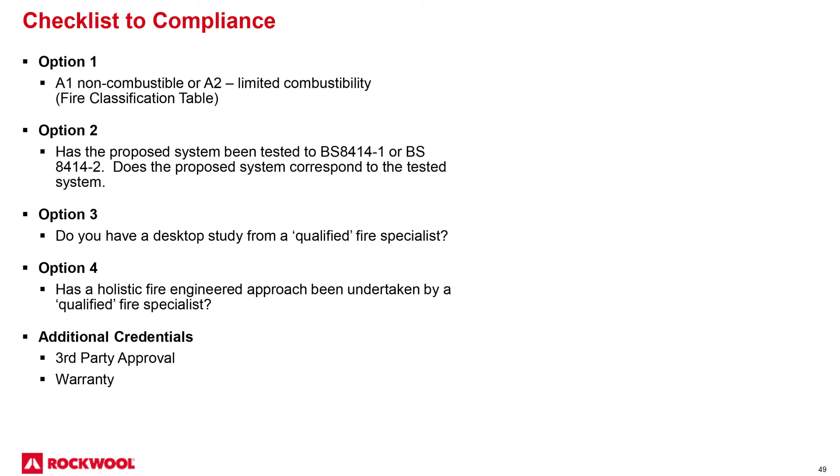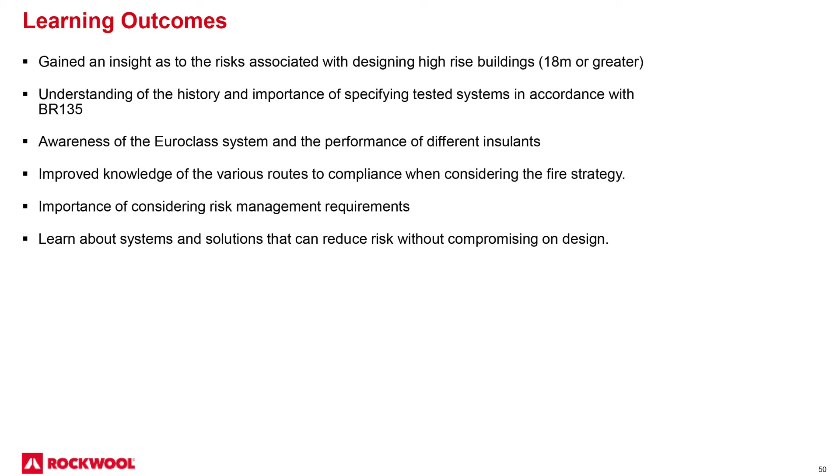So hopefully you've seen a bit of an insight. You now know why 18 metres is 18 metres - it's not 4 metres, it's not 12 metres. You've got a bit of an understanding of BR135, up to the 3rd edition now, no doubt a 4th edition will be on its way, the Euroclass system and how different insulants perform in respect to 13501, and the all-important risk management - the likes of Zurich and Allianz getting very vocal, and how they're certainly looking at what insulation products are going into external facades post-Grenfell.